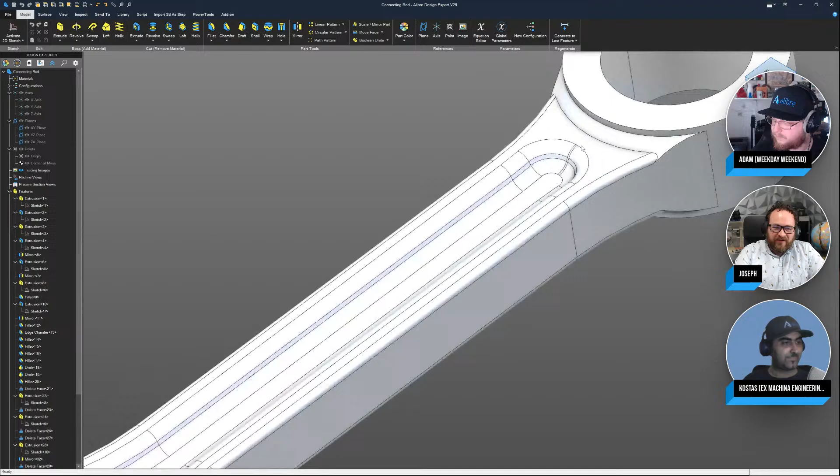But yes, Kostas, you're right. One of the things I think we want to ask is, are these fillets doing a job right now? And they're pretty close to a loading zone, so I'm inclined to keep these. But I think one of the things is FEA is iterative. You can test it with fillets, test it without fillets, and see if there's a difference, and then you can change fillet size or change meshing quantities until things stop giving different results, and you can kind of come to a convergence that way.

So step one, always make sure that we simplify and remove anything cosmetic and ditch things that might cause little tiny slivers that can throw the analysis off.

I'm going to open up Mecway here, and Mecway is just one of many things that you can use with Alibre. When I import, I can take this connecting rod that I have, and it imports the native geometry with interoperability - really nice not to have to convert to a step and reparameterize and do all of that.

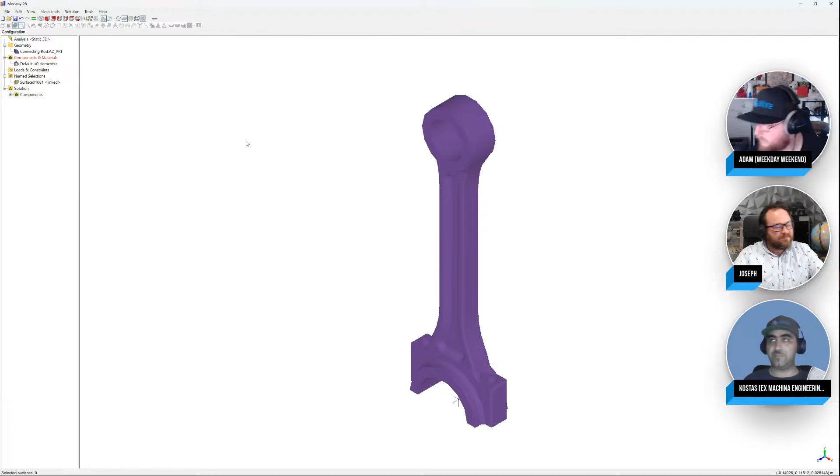Okay, so the next step is, once we import our geometry, basically what we're doing, if you've never done FEA, is we're going to choose some faces, apply a load on those faces, and see what the part becomes, where the stress is, and if we can prove the design.

And so in order to do so, we need to build something called a mesh. There isn't really a straightforward formula that tells us what the stress is when we apply the load to the part. And so a mesh is something that takes a big impossible problem and makes it into thousands of tiny solvable problems, so we're able to compute the part and see the stresses. It's the translation layer between geometry and how we get the math solved.

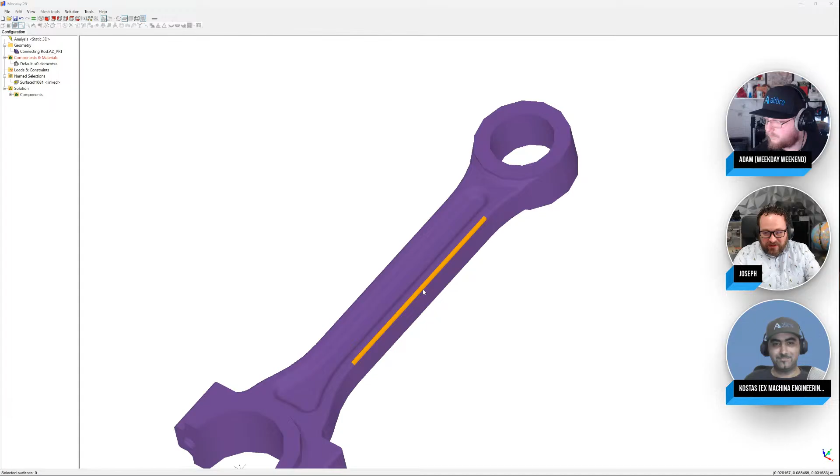So mesh builds like a network of nodes. But let's talk about what FEA is not. It's not truth. Every step of the way can introduce errors and inaccuracies, and we need to be careful to follow good practices and be skeptical of every step we take. The final authority of FEA really should be backed up by some hand calculations to verify that we're in the ballpark. So this isn't magic, something we just tell the computer to compute and it automatically gives us good results. We've got to be conscious of everything we do.

Does that land with you, Kostas? Oh, for sure. It's a bit of an acquired skill, interpreting the results you get from FEA. Your natural instinct is to just plot the legend and look at the maximum stress value, and if it's more than the yield strength of the material, you need to redesign it — which is not true, right?

By the way, we just had a message from Alexis in Greece. That's the guy — that's the guy that got me here, by the way. So shout out to George from Alexis in Greece.

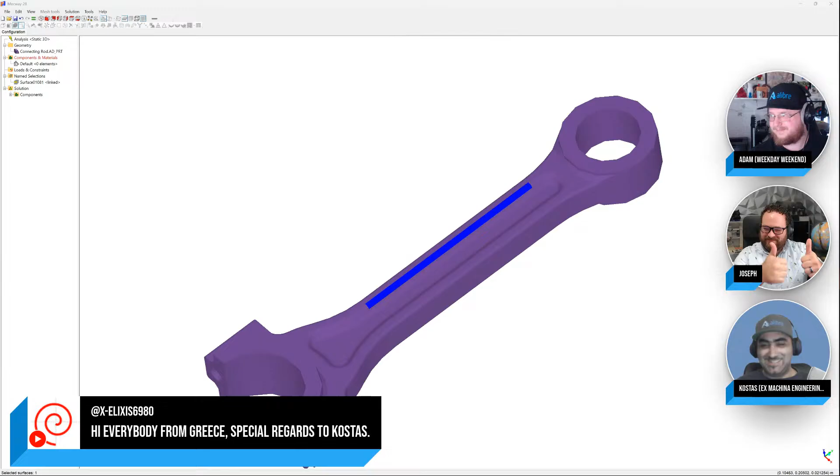So yeah, it's an acquired skill, right? In my video on how to do FEA with FreeCAD on a model designed in Alibre, at the end of the video I show the distribution of stress values. FreeCAD gives you a graph of the distribution of stresses across the nodes. You can see that on straight edges you might get a stress that's 5, 6, 8 times higher, but out of a sum of like 200,000 nodes, it only appears in 30 nodes, for example. Well, that's not natural. That's a fake reading right there.

So yeah, FEA is a massive tool, amazingly helpful, but you need to know what you're looking at. It's the age-old problem of trust but verify, right? Absolutely. Very, very much so.

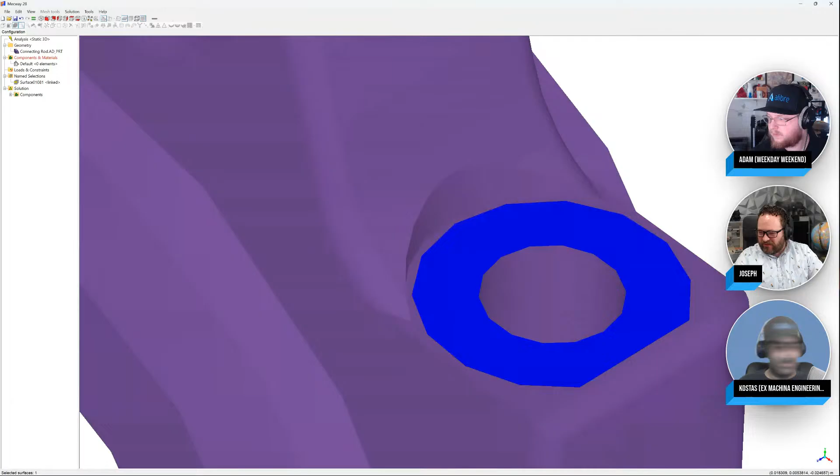So as we look at geometry, we can see that I have certain faces split in half — there's half of a cylinder, the other half of a cylinder. When we have bolts, there's a face that reflects the footprint of a bolt head coming down on it. And that's not by accident. I actually did some things in Alibre to split the face so that we can import it with certain faces that reflect the loads that are going to go on the part.

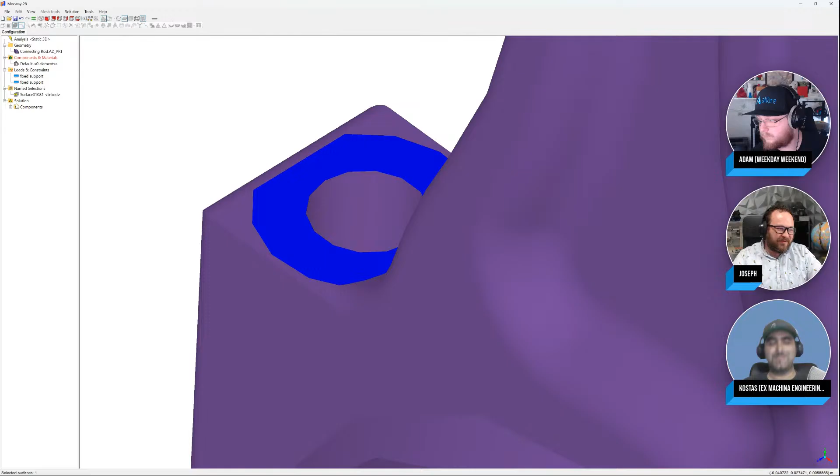We call these boundary conditions, the things we apply to the part to run the stress and constraints. So here I'll say loads and constraints, and I'm going to add a fixed support. Now, fixed support is very general. When we add these, we want to be a little skeptical and ask: would a frictionless support be better? Would a pinned or elastic support be better? There's all different kinds of things we need to ask — does this reflect real life? We're going to get into some examples of that as well.

Now I'm applying these loads to the geometry before I've meshed. One advantage of that is if I apply it to the mesh instead, and then change my mesh, I lose all my boundary conditions and forces. So something to keep in mind — that's my personal preference, to save some work for myself.

In the positive y direction, let's apply a load of about 750 newtons. We currently can't see the loads we've applied because we haven't made our mesh yet, but those are some of the things we really want to keep in mind.

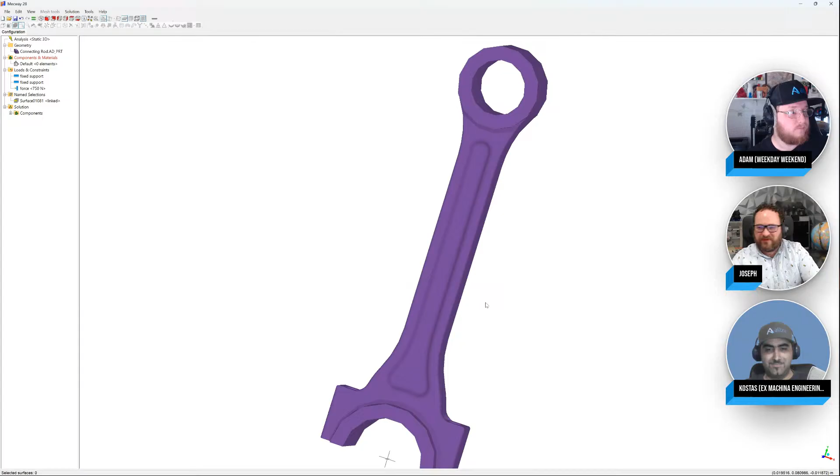So, is the load distribution realistic? I've made the top face in half to say I don't want this entire cylinder face pulling with 750 newtons — it's only realistic to say the top half. Now, is that going to pay off? Is that going to be realistic? We're going to see, and I think there's more to this story. Oh yeah.

Now, if it's time to build our mesh, we have some interesting options. I'll right click on my geometry and go to meshing parameters. It gives us all kinds of things.

Personally, I start pretty coarse and then refine. I have this predetermined setup that shows some good and some bad things about meshing. I'm not making a perfect mesh here, but one I can talk about more. So the maximum element size will be 10 millimeters, and the minimum element size is 1. Again, this makes a network of nodes that we solve thousands of small problems that converge into the actual solution we're looking for.

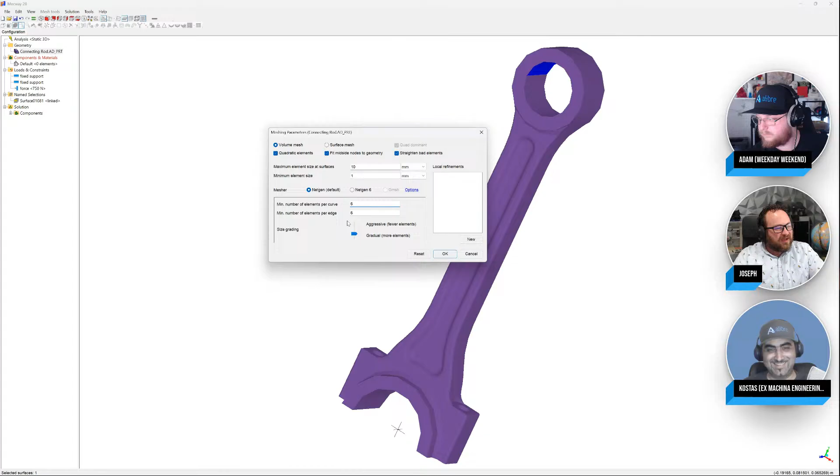And then I'm going to say 6 and 6. So the minimum number of mesh elements on a curve will be 6, and on any given edge, we'll have at least 6 elements along that edge. Again, you can play with it as you do and come up with the best mesh.

There are a lot of things.

I understand we're on a live stream, but just that window menu, right? Just a menu window, we could be discussing for 45 minutes, right? Yes, it gets deep.

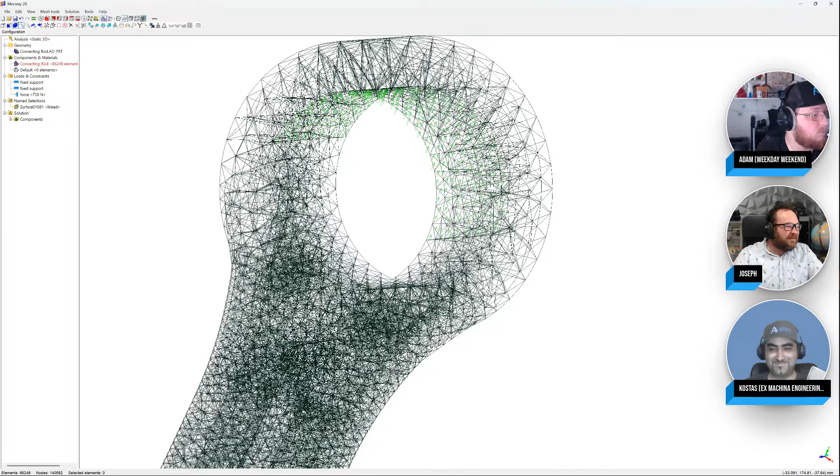So now that I've generated a mesh, we're going to be loading it into our view here. There we go, we have this network of approximations. We've turned the part into a whole bunch of triangles. If this sounds like an STL file, it's not all that different. And this is kind of a mess to look at, so we can change our view to see the outer surfaces here.

There's a few things that maybe we would like to review. A big thing is, look at this triangle right here. This is a beautiful triangle because it's just about an equilateral triangle. We might call this a good aspect ratio. If we come down here, look at these triangles that are not equilateral - we care about that.

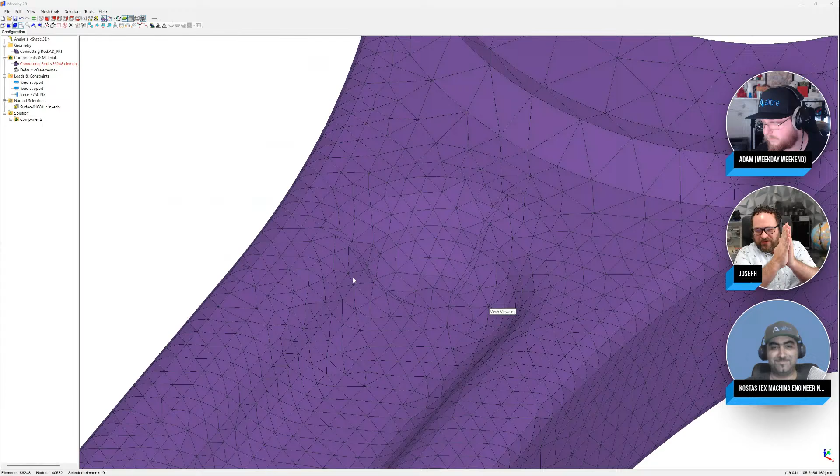We would probably call that an element Jacobian issue, or how much aspect ratio or how distorted is this mesh. It's probably not possible to have every triangle be perfect, but that's what we're going for. So when we see things that are really distorted, we ask, are they in a place that's really critical? Are they going to cause any errors? Do they converge into like a little needle? But I'd say we have this big load path here, and then we have tiny triangles here. As far as Jacobian goes, these are probably more of a small footnote than something we're going to have a showstopper over.

But what do you think, Kostas? So you chose the maximum element size at 10 millimeters, and you chose the minimum at 1, right? Yep, in that menu we were talking about earlier.

What is that fillet size? Like 3-4 millimeters? Somewhere in there, yeah. So if you drop your minimum size to 1/10 of your smallest fillet, you would get further away from that situation. Maybe not eradicated completely, but then what you're doing is creating a huge mesh and a huge mess, and you're taxing your computer

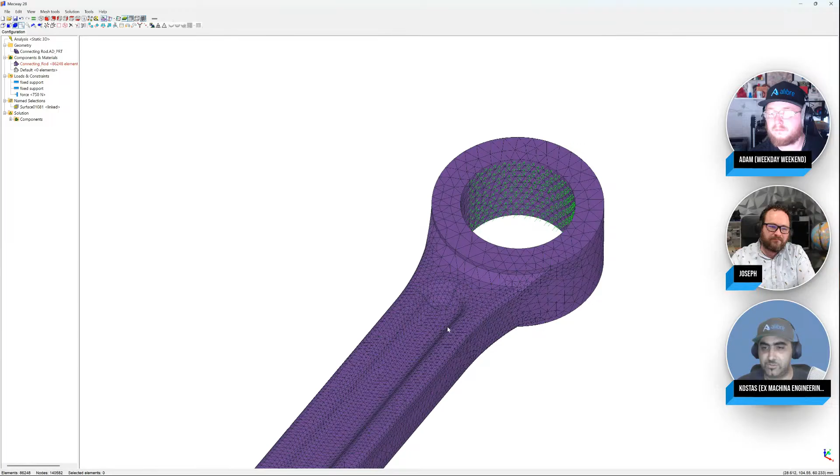and the piece of software that does this meshing - they're very, very memory hungry in terms of RAM, right? So I've had, especially in older PCs, solvers fail because they ran out of RAM. So that's another thing to consider, right? There is a physical limit to what you can get done with your current system.

But yeah, generally speaking, that's not ideal, but it shouldn't fail while solving. And a big question is, what are you solving for? Right now, I'm solving for quick results so I don't keep everybody on the live stream waiting.

There you go, absolutely. There are times in thin areas where if you have bending, you're going to want to have a lot of layers across that little thin area so that you can have the resolution to see where's the zero axis, how's the stress being distributed. So setting up your mesh is so critical in so many ways.

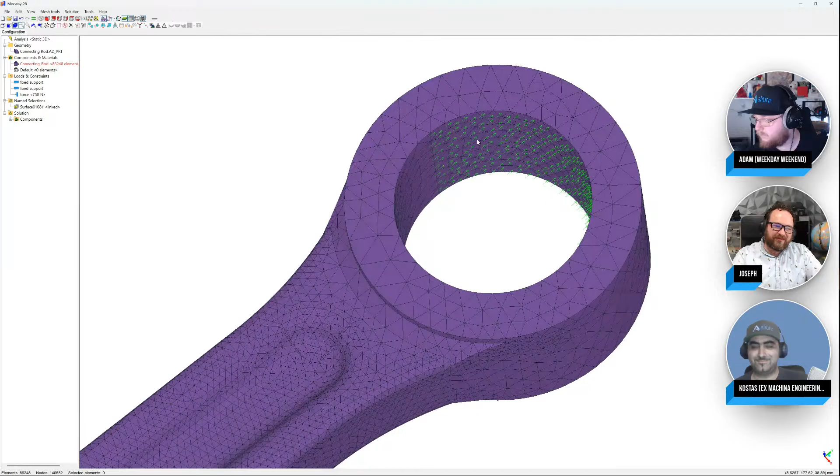And I might point out the important parts are things like holes to have a fine mesh on, and fillets, and also where the stresses are. And I wanted to point out that our mesh is looking pretty large here.

And Mecway offers a really cool option where I can select the face of a mesh and just click on Refine, and it makes the mesh twice as fine. I can do that again and again. So we can have a coarse mesh throughout the model that is light and easy to compute, but in really important places, we can refine it to get something that is more substantial and high resolution. And this is not the best mesh in the world.

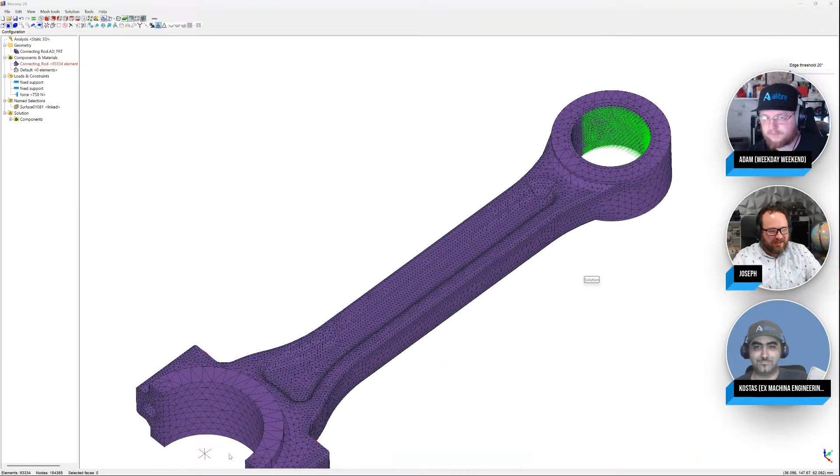And I kind of have done some of that on purpose so that we can view the results and see potential problems and know what to look for. All right, so we've got a mesh. We have our forces. We have said that where the bolt head is, that is staying put. We're not moving these fixed places on the bolt heads. We're applying a force up here, and the mesh is what calculates or helps us do the math to solve

this problem. I'm going to go ahead and solve for this, except I just remembered we're going to fail because I need to add a material. Yeah, that'll do it. You get in a hurry when you get live, what can I say? So we'll assign a new material. Mechanical, isotropic, let's say 200 GPa, ratio of about 0.29-ish. That's steel-ish. Steel, yeah. Low carbon steel, that is.

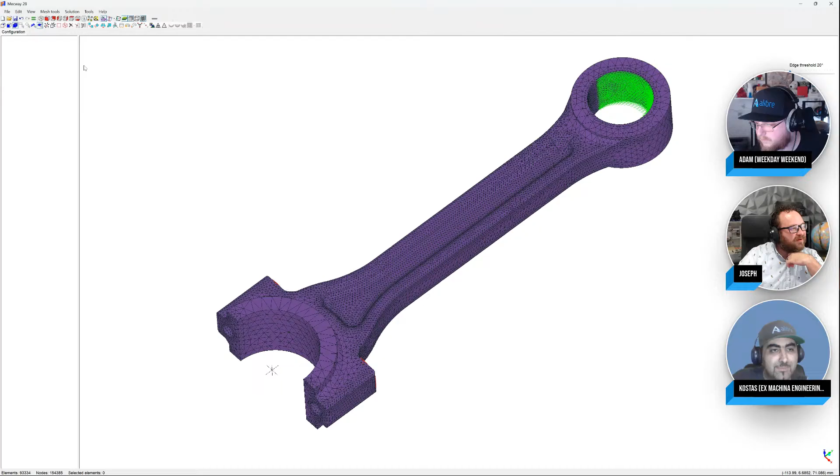And it looks like it didn't take that material, so we'll go ahead and there we go, isotropic, 200 GPa, and then 0.29, yep. Yes, thank you. And I'm still getting material error, so we'll just make sure. Assign new material. I think I was just doing that on the wrong part there. There we go. And we are solving. This is not the best mesh in the world, so we're going to see what kind of results that we have.

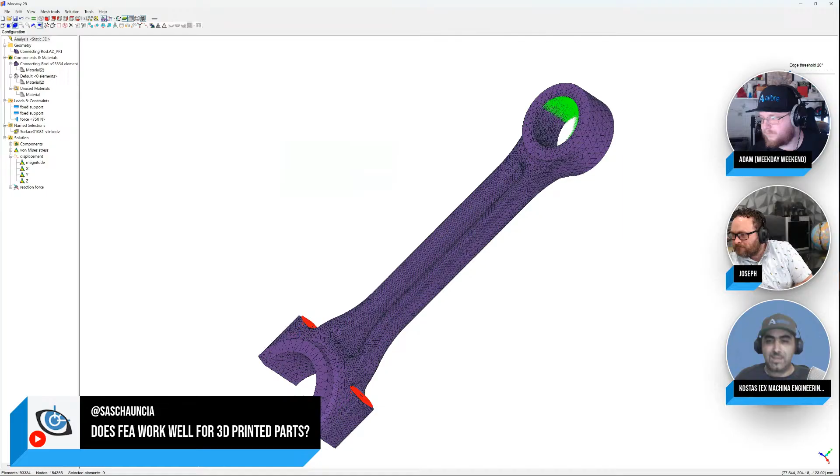In that sense, 3D printed parts behave a lot like wood. I was going to say the same thing, with the grain or against the grain. Yeah, against the grain or across the grain, exactly. Anyway, so you need to take that into account. Now, that is not an isotropic material, but there are finite element analysis software that will allow you to input that discrepancy, right? To define the difference. And I found that if you take into account that layer adhesion is like 15 to 20% of the strength of the material, you can get some decent results.

But I would love to see an FEA dev basically take some features of a modern slicer and combine it with FEA tools to be able to slice your model and then create a mesh and then do some FEA calculations. That way you get accurate infill. Imagine this. Couple what you just said with a robotic arm doing the printing, where you can change the layer direction while you're printing the part, and you just created something really interesting.

And there is research in that area, but at the moment it's just in universities, and there are random papers being put out, but nothing that everyday people can use, right? If anybody here is amazing at C++ or Python, go and work on the FEA analysis part of FreeCAD and add that in, will you? There you go.

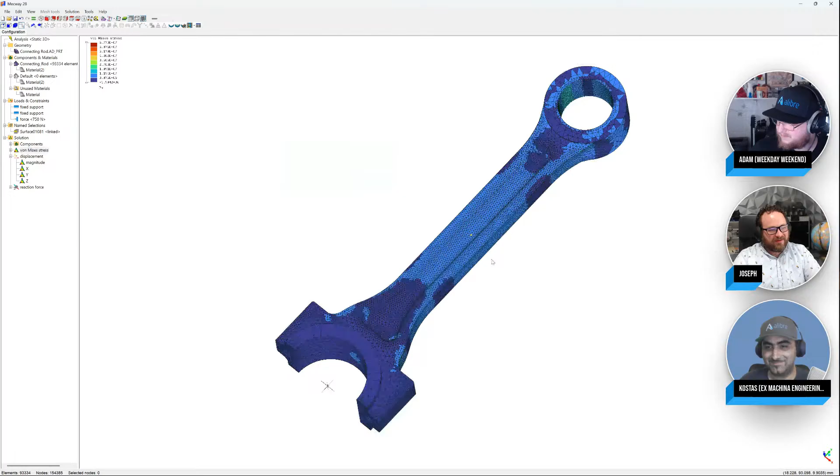So we were able to calculate and we were able to get our results here. Nice. Yes, we might call this our von Mises stress.

I'm not very good at pronouncing French things though. Von Mises. Isn't it German? Is it, or is it French? Yeah, Poisson is French. I know that. Poisson ratio. That's a French guy. Von Mises sounds like a German name. Pretty sure it's German. Could be wrong.

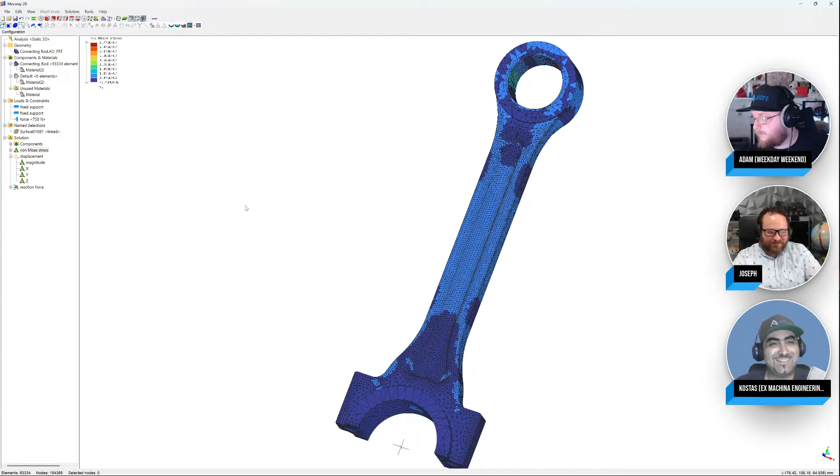Anyway, so we've got this beautiful thing. Now, I think some people might be looking at this and saying, look, we have almost no stress going throughout our part. This is a great win. But we're looking at scaled numbers, right? What if that blue is 90% of the part's capacity to hold stress? Exactly. So we can't pat ourselves on the backs just because the colors are looking low. Not just yet. And that might actually indicate a problem because it looks like we're getting the highest stress in a very concentrated area. And this indicates a few problems.

So the colors are pretty, but we got to do some validation to see how legitimate they actually are. And I think one of the things that we should start off with is this animation of the part being pulled. Of course, this isn't the real displacement of the part, but we look at this and ask ourselves, is this a realistic version of how this part is going to interact under force? And if something is going terribly wrong, then we know there is a mistake with how we set up the analysis, and it's a good high-level indicator.

We also might want to do a few other checks. So we might want to balance our forces. And so here we've applied a 750 Newton force upwards, as you can see there. Which is very small, by the way, for a conrod, right? It is pretty small. During the combustion stage, they take close to a ton of weight in load, like 1,000 kilograms of force. So 750 Newton is like just tickling it. This is an idling analysis. Okay. It's like you're going downhill, no throttle.

Right. So I can look at reaction forces, and I can say take all the reaction forces and evaluate what they are. And we get negative 749.99999, right? So we lose a little bit of forces in the X and Y direction. But this is a good litmus test because then if I say all my forces in the X, that's almost zero, e to the negative 11. Evaluate again, negative 11. So that's another thing, we were able to balance our forces. I don't know if anybody would take an FEA seriously if there's not a verification that the forces have been balanced.

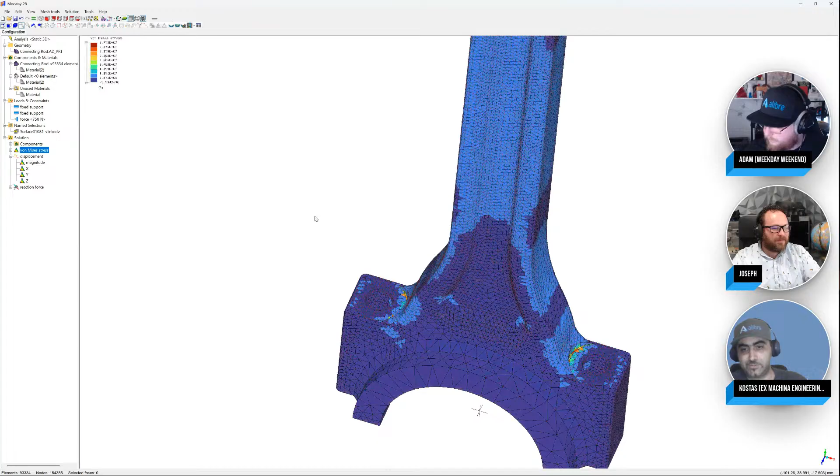Yep, exactly. And many times that reaction force is the result you're looking for, because you might be running this entire analysis just to select a bearing, like a plain bearing, right? Yep. So then the reaction force is the result you're looking for. You don't really care about the stresses developing. That's a great point.

So when we come into here, this area is really problematic, and I think it teaches us a few lessons. One, I have something that is almost as red as it can be on the scale, and it's butting up against something that is almost as blue as it can be. So this is a call for a few things. The first one, there is a stress gradient, right? There's a stress that is high in some places and it goes lower, but we can't really see that well because we haven't refined our mesh. We need more nodes in this area to get good resolution.

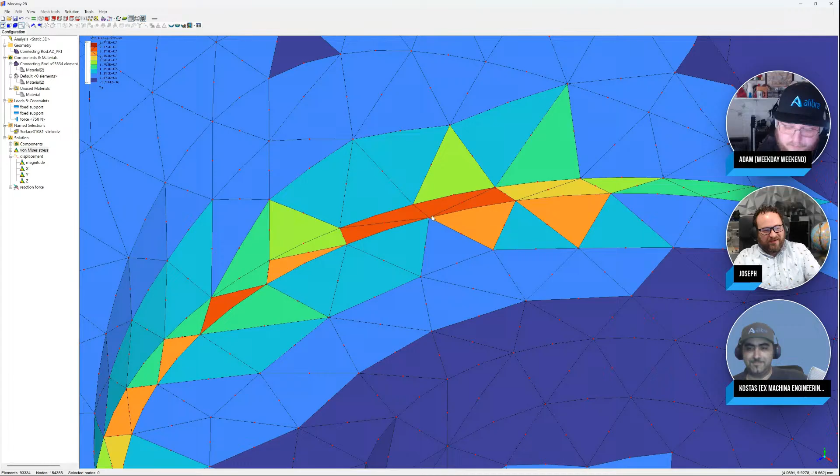That's something that we want to look for because we see the colors, but it's not giving us very valuable information. And another thing is we have a sharp edge right here, and we can tell the stress is building up right there. This is a lesson that we need to check this geometry to make sure that it's going to work. Yep. When we scale this, say in megapascals, we're at 67 megapascals, and the yield is probably a minimum of 200, depending on the kind of steel, I think. But at least we're not breaking.

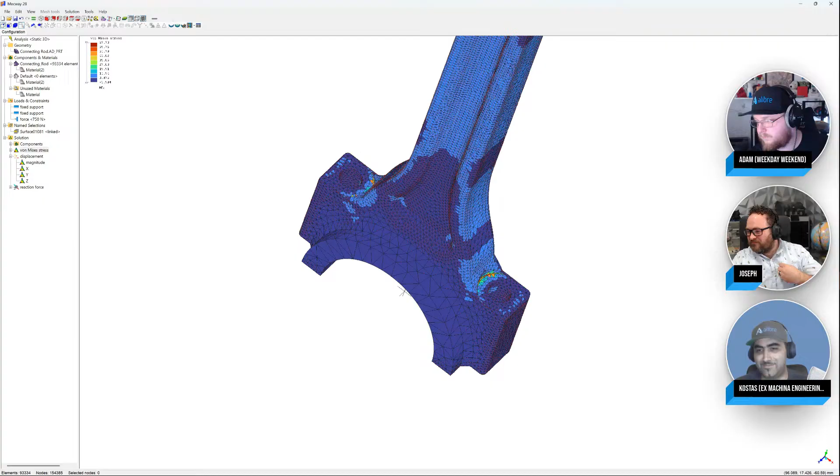200. I don't think there is a conrod in production that has a yield strength of 200. Yeah, I don't think so. Like, minimum would be, what is the next one up in the DIN designations? I think it's 275. Yeah, should be, which is like a 1040 steel, if I'm not mistaken. I haven't used these conversions for a while. And it could probably go way higher too, depending on how they treat it. You can even have motorsport connecting rods with stellite, titanium alloys, all that stuff. Then you go really high numbers. Absolutely.

So these are a lot of cases that we want to look at. Now we can scale the colors, and we can ask: is this realistic? Also, would we be getting a lot of stress in the regular function? Now, if you recall, I split this face into two cylinder halves, and maybe I want to pat myself on the back and say, "Oh, look, I applied the force on the half that sees the force." But I might want to question: is this actually realistic? And I think one of the lessons is if we set up the study a certain way, we get results in that certain way, but it may not reflect reality. So we could probably do a better study.

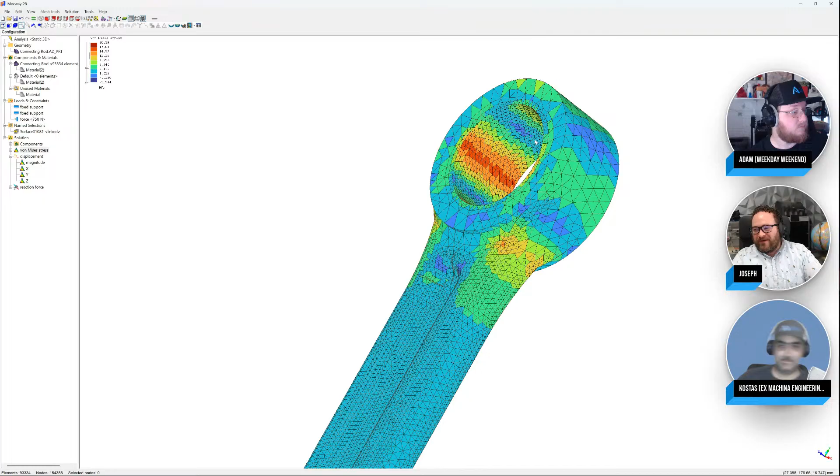Let me load some results here. You can always do a better study. Oh, yeah. That's the problem with finite element analysis, right? It does depend on the computer you have.

While he's loading that up, there's a really good question. Do you have some proposals for CFD working well with Alibre? That's a great question. I'm kind of wondering. Oh, it looks like my import completely failed. Oh, maybe not. So for CFD, I don't know if that's on the radar yet, but I would sure like to see CFD. So we are going to have some other FEA people with us, and maybe that could be a direction that we could look into. I love that suggestion.

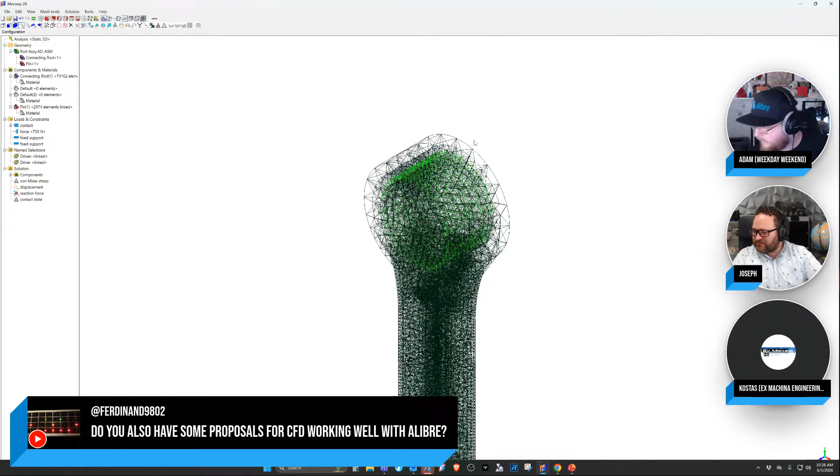I read that as Golden Knights for a second, and I thought, "Ooh, a hockey fan," but they're in the final bracket.

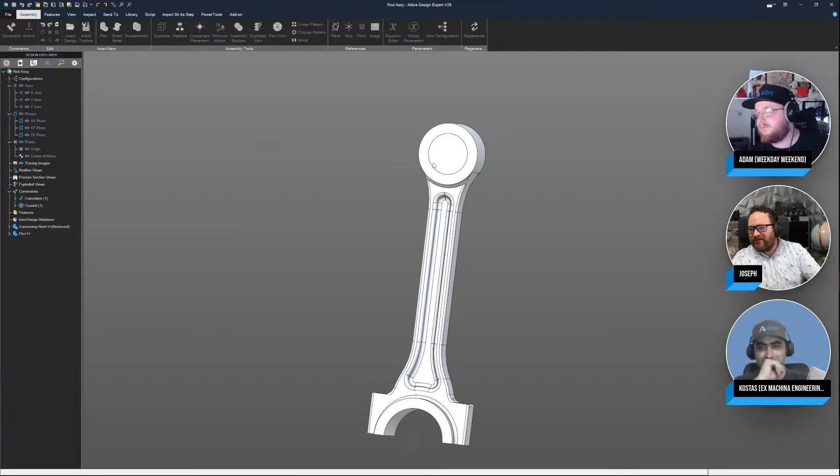Excuse me, show my stress again. I don't know if this is going to work. I got kind of a funky import on it. But I did something different here. I made an assembly. In fact, while that's solving, I can pull it up. Where I put a pin right in the middle of our rod that would represent the wrist pin. Exactly. And then I put a contact constraint between both of the bodies to say these are in contact. And I think we might get a much different result just by adding another step to make it more realistic. Yep. Do the colors look pretty?

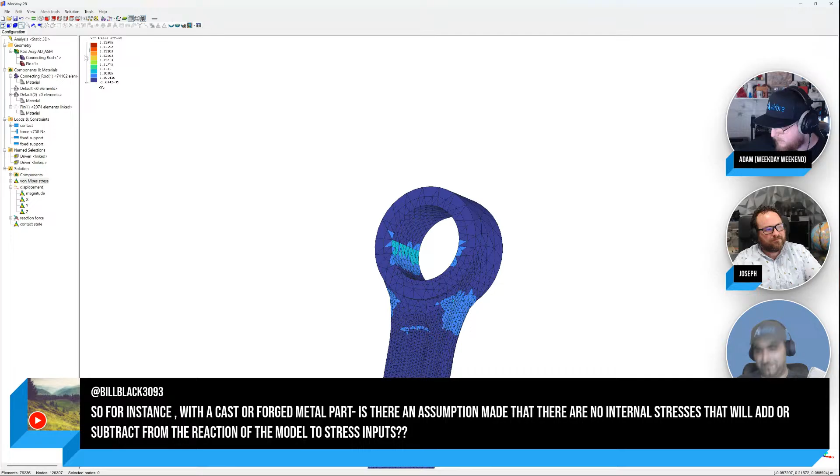So this guy is Bill Black. I believe he's Taco Guy, right? Yeah. For instance, with a cast or forged metal part, is there an assumption made that there are no internal stresses that will add or subtract from the reaction of the model to inputs? Excellent question. Yeah. So Bill Black has touched on a huge subject there, right?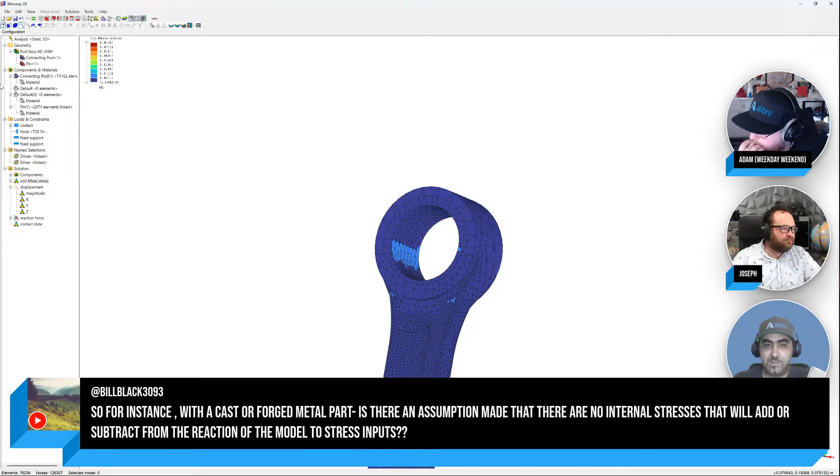The problem with that particular question is that you do not know what the internal stresses are unless you do some test runs, right? Some destructive testing. But when you do have that information, you just sum the stresses that you get from the finite element analysis with the internal stresses as they appear, and that's about all you can do. I do not know of a way. Well, I guess you could model them as pressure loads in your finite element analysis, but you're making way too many assumptions.

Just like with 3D modeling, we say that you need many features that have simple sketches. Finite element analysis, you could say that you have a similar rule where you have potentially many simple pieces of information rather than trying to build a very complicated one and throwing it at the PC. If that makes any sense to anybody. Yeah. That's a great question.

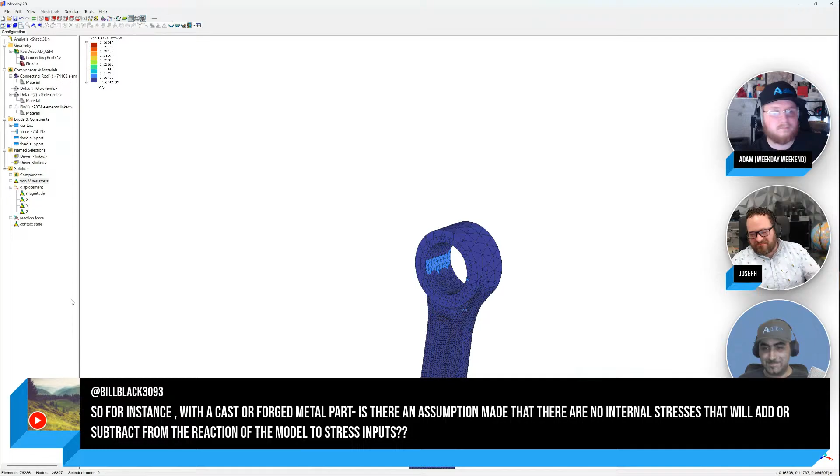So yeah, when you go to show that you can add a pin in the middle and make it even more realistic, right? There's always a better analysis, and it's really kind of an iterative process. Try it with this mesh. Do you get different results if the mesh gets finer? Eventually, you start converging on the same results with different settings, and that's when you know things are at least consistent. And if you're running it on a really good basis, that's pretty encouraging.

So the thesis, I think, is have it connected to the real world. Do some hand crank calculations to make sure you're in the right ballpark. Oh, for sure. Make sure you question every step of the way and understand what meshing implications are. So, just a quick overview on what that's going to look like. We're going to revisit this topic in even more detail, and we're actually going to have someone from SimWise come and show what the Alibre add-in for FEA looks like, which will be pretty exciting.

There are softwares that specifically simulate casting or forging and can show what the internal stresses are going to be with the right modeling and simulation. Very nice. Very good to know. That's very interesting. I'll admit right off the bat that my weakest area of expertise is casting, forging, that sort of stuff. So I've never used that type of software, but I can imagine, because internal stresses come from differential cooling, right? When the part cools at different rates, that's how you get your internal stresses.

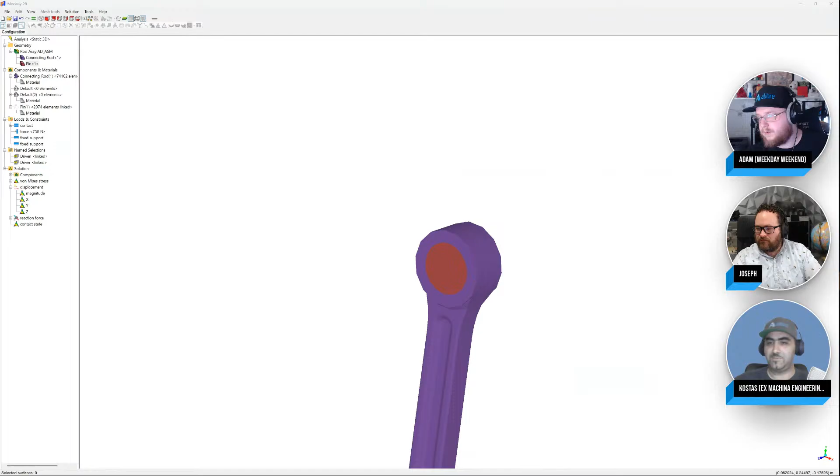And if they can simulate the cooling, I bet you they can get a pretty good idea of what those stresses are. So yeah, for sure, that's very interesting. It's a nice insight into that side of engineering by Araf. Basically, trust but verify. This is already an old video on my channel here, but this was a SolidWorks injection mold analysis that was kind of cool.

Yep. I think it's kind of along the same lines, but you can see it fill, you can see how the plastic's acting and all of that. Yeah. I also did that. I also have one in my channel. I don't know if it's public still. But Inventor has a nice simulation module for injection molding. Yeah, so pretty cool stuff.

Let's see, that's a pretty cool wallpaper right there. Yeah, I love that. Hot rod going into the Supra, huh? Is that a Mustang way in the front? Skinny. I think so. Yeah, because you need to give the Mustang a head start, or otherwise it's not really fair, is it?

Well, I'm a bit of a Supra fan, so I probably shouldn't weigh in on this one. Well, yeah. I might drive a French car, but I'm JDM deep down. Gotta love it, man. The 2JZ was such a crazy engine. Yeah. 2JZ, RB26. There's another straight six from Australia, the six-cylinder Barra motor. That's a good one too.

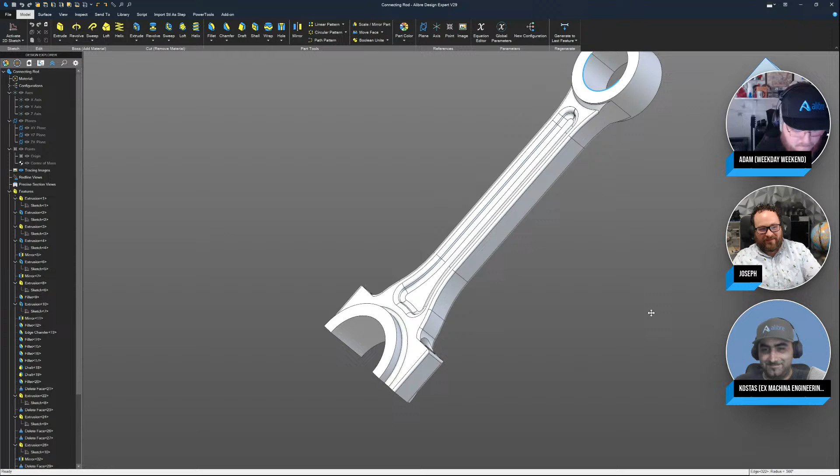Now, I think when you do FEA, it's really important to be able to split your faces, because I need something that shows the footprint of the bolt, or I can't really select it to add a force, at least not conveniently. Extremely important. So I'll just run through that real quick. I think it really is.

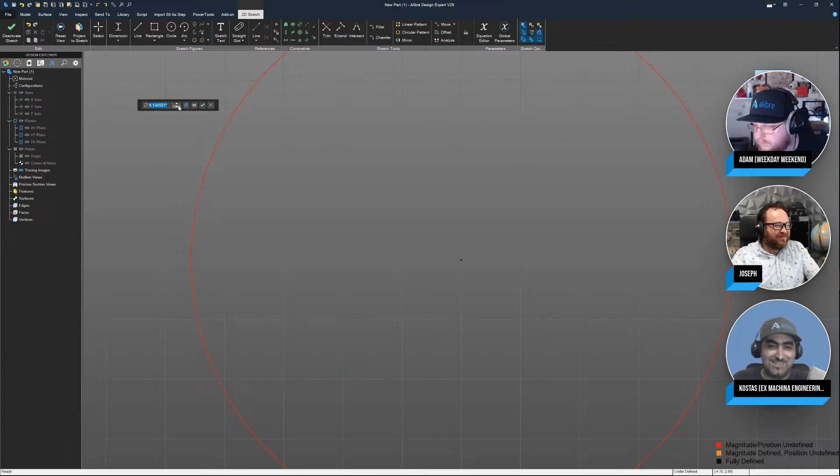Man, if I had known about that method that you developed to split surfaces in Alibre earlier, it would have saved me weeks along a few projects. That's such a clever thing. That was an awesome video, man. I love that one. I appreciate it, man. It's so useful.

So the basic way to do it is I have a model. I want to split this face to simulate maybe the footprint of a rod pushing into it. So I will activate a sketch, make a sketch around the area that I want to split.

Corvette versus Supra. It's been done before. Let's not get into that. As long as it's one of the old Stingrays and not one of the modern ones of the past few years. Well, the modern ones are closer to the Supra. That's the issue there, right? I love Corvettes, by the way. I absolutely love Corvettes. Let me just say that. So dino dragging a Supra, that 2JZ was a beast. It was something, man. You just can't beat the LS.

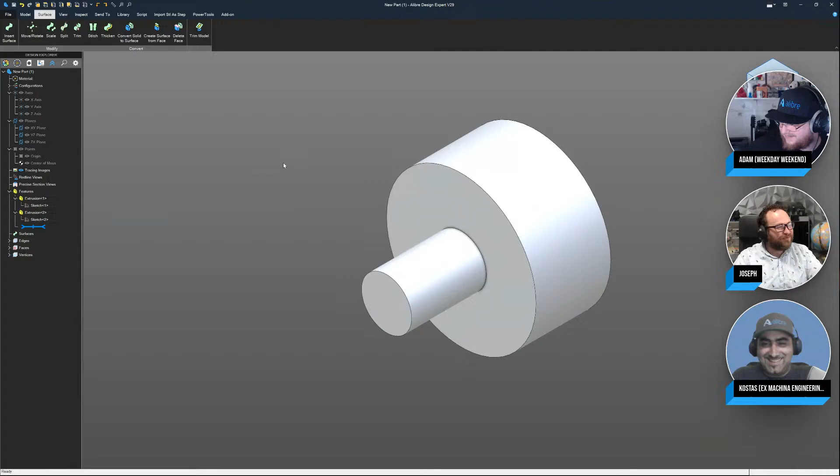So I make an extrude on the face that I wish to split, and then I can get back to CAD. Delete face. Now we have just a hollow surface with the thing that we want to split that's missing, right? So we start a sketch on here. I can convert this as a figure. I can extrude, and then once again, go back to surface.

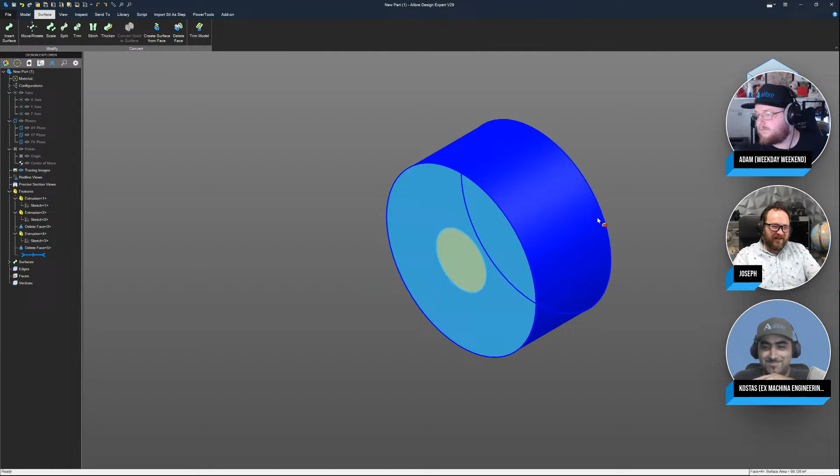And I only care about the bottom surface of this cylinder. So I'll select delete face, get rid of these faces. And I've created a surface here that fills up that missing spot. And then I have my regular surface that I converted. I'll just stitch that to a solid, right? Stitch to solid, select these two, and I've got a split face.

Now this is useful for creating a face for a contact patch, but it's also useful if you want to add text or a label, like a warning label or a logo, if you want to render something that has a different spot without adding these micro extrudes that might throw off mesh. So it's very useful when you want to split faces and create these kinds of geometry, and there's more than one way you could use that. Very nice. Little quick mini tutorial for everybody there.

By the way, those micro extrudes is the way I used to get things done when I needed to. And oh man, you just go down a rabbit hole, and they're so restrictive with what you can actually get out of the analysis. And this method that you showed everyone is so much better. Yeah. Micro extrudes really hurt because you're like, I have to put tiny mesh along that little wall.

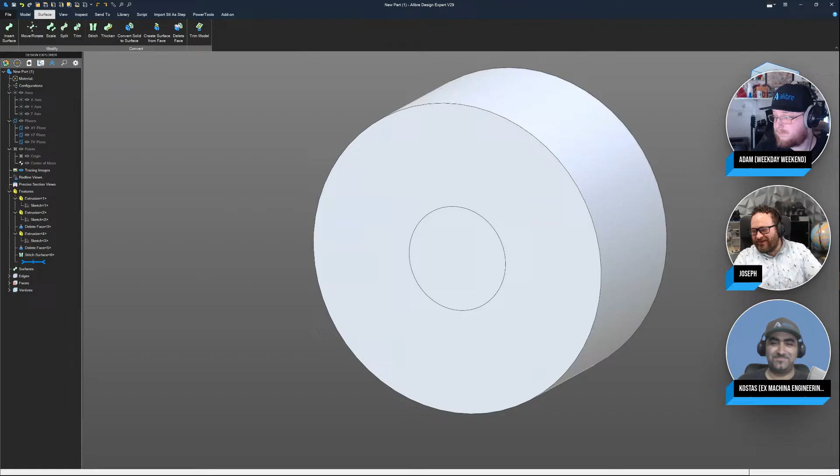Exactly. Which makes everything worse, basically. Yeah. Oh, okay, that is my wife. When we're together, she usually has to drive because if she's shotgun, she'll get motion sick. So yeah. Well. Okay. I'm glad she's a good driver, though. So no problem. That's good. Yeah, but the solution to that is you just get like a stupidly fast car, and then they don't have time to complain. Oh, yeah. Anyway.

That's interesting. Yeah, similarly, if we're modeling a 3D printed part in FEA, the part would have to go through the slicer process first. You'd have to have a GPU farm under the desk to crunch all those numbers. That's very true. Finite element analysis can get very resource hungry very, very quickly.

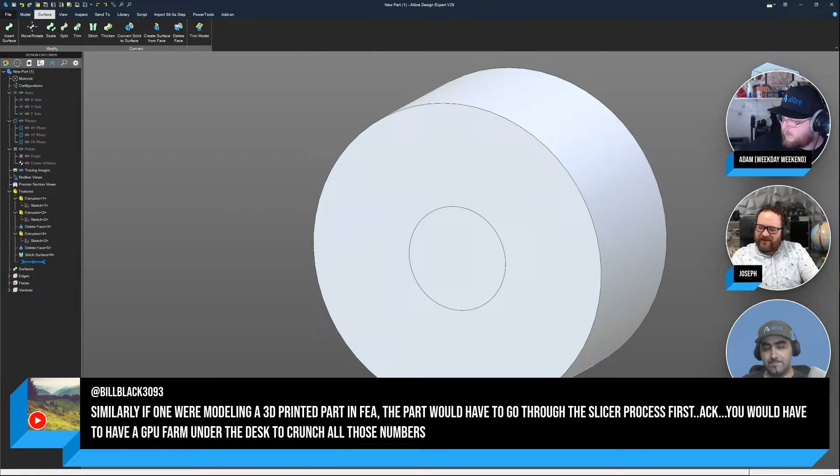I think one of the things that really helps with that is using a quadratic mesh, which we didn't cover. But let's see if I can. Anyway, on your triangle, you can put a node at the midpoint of the line, and the node can have some curvature to match curvature better. It's known as an integration point, and it's also another spot where you can solve. So it increases the number of nodes and resolution without drastically increasing everything. Yep.

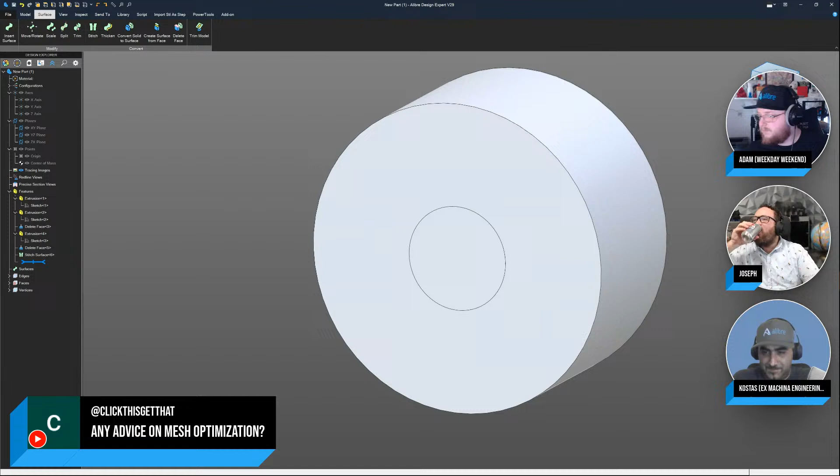Oh, that might be a good one. Mesh optimization. Oh man. There are methods you can use, but just like it's better to prevent a disease than to give a medicine for it, it's better to simplify your model before going through the entire FEA process. But if you have to have some features for whatever reason, you decide that this feature needs to stay in. Mesh optimization is basically two different things for me.

One is minimum and maximum size of elements, right? And the other is most meshers will allow you to select a specific area, just like Joseph showed earlier, right? Select a specific area and increase the mesh size or decrease it or manipulate it or whatever. Some meshers also allow you to select an area and give it different maximum and minimum element sizes. So the idea there is

small elements give you better precision, but you run a higher risk of having a singularity in your calculations where you get infinite stress when in reality there's not going to be infinite stress, right? And it actually runs slower, whereas larger elements means you have a more robust analysis, less chance of it to fail.

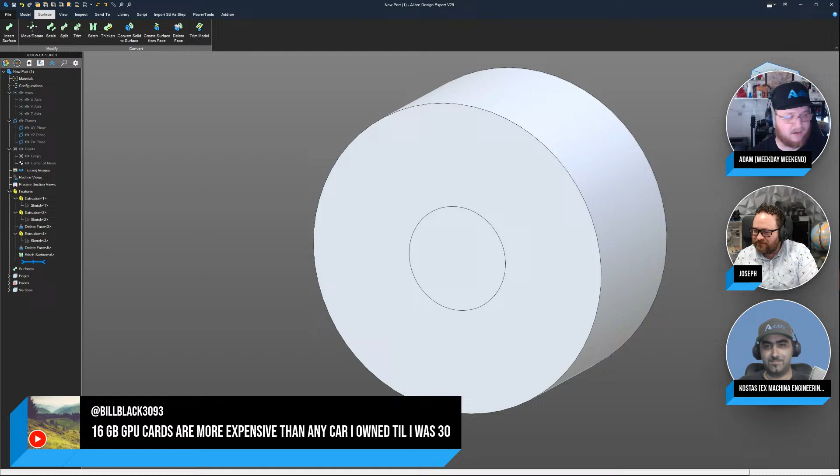Bill Black. Yeah. I don't know if you've checked the price of RAM recently, but I'd rather buy a video card than any kind of RAM right now. Yeah, yeah. I'll buy like a 5060 or a 9070 non XT before I'd buy 32 gigs of DDR5 right now any day. Yeah. But that's a good point.

Yep. This is a good one too. Have the mesh fine enough that one color zone is at least a few cells wide. I think that's a good one. That's great advice. Yeah, that's a good rule of thumb.

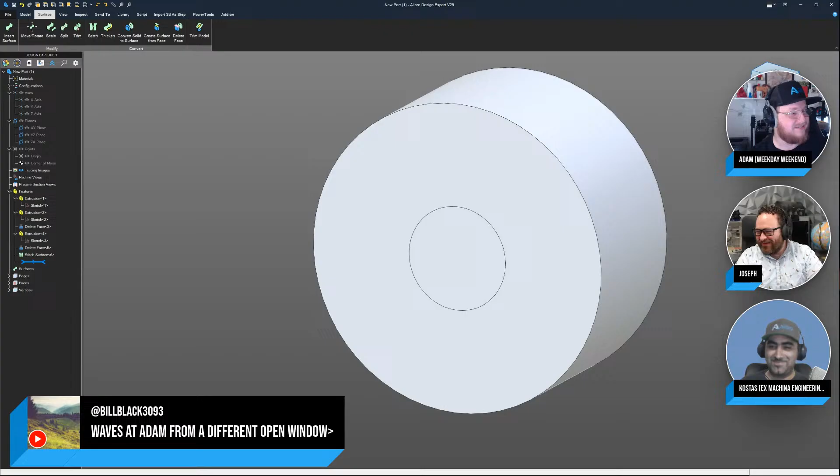Yep. And that's our winner from the last one. Won some maintenance, so good to have you back. Oh, Araf is a regular viewer, I think. Yep. He is. Waves at Adam from a different window. Yeah, he moved to my chat from the Alibre chat. He's got multiple tabs open. He's got us all. Hey, that's awesome. There you go. There was once someone, when I used to stream a lot more doing video games, who told me that he just keeps my stream open on a tab all the time. So whenever he just hears my voice talking, he knows that I'm online, just out of nowhere. Okay. There you go.

This is an interesting one. Took a numerical methods class that taught about doing 3 different grid resolutions, using all 3 to try and estimate the true value. Is this something that should be done in FEA?

Yeah, basically that's what Joseph is describing, right? When you change up your parameters, but your results are relatively stable, then you know that your results are not fake. They are results that you expect to see in real life when you load up the part. So it is very much a similar thing to do.

Yep. Sounds very scientific. I'm not an FEA guy, but basically, when you test something scientifically, you don't do just one test and say, 'Yep, that's the correct answer.' You do a couple tests, sometimes dozens or hundreds of tests.

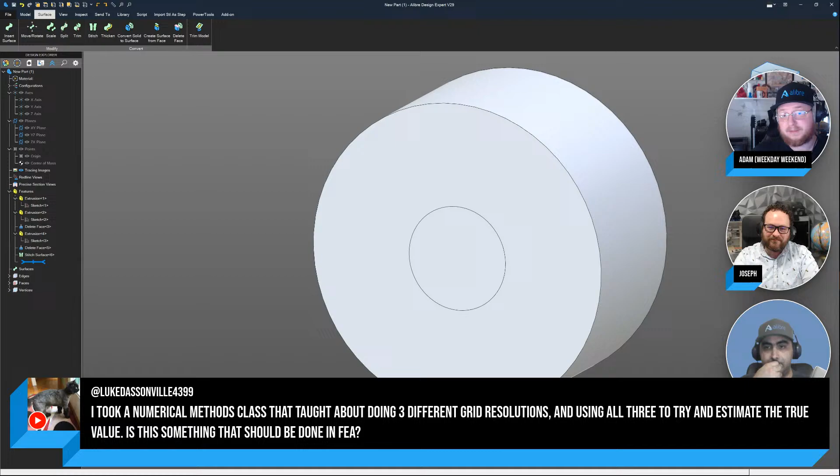If this is going to be a part that's going to go into hundreds of thousands of production units, you're going to want to spend quite a long time making tests. As soon as you get those results solidified, they're the same, and you can trust and repeat those results, then you know what you're after, and what the actual solution is.

Also, because you mentioned large production runs, right? If you're making a part in large numbers, you do the FEA, and what you do next is you go and break the part. Yep. You put it on a hydraulic press, load it until you have it in pieces, and then you check: was the failure point close to where the FEA showed me the red color?

Because then you know that the FEA did predict the stress pattern, so I know I can trust it. If you break it and it breaks at a different point, there's something wrong with your finite element analysis, and you cannot trust it, and you need to go back.

Since we're doing it, I'll tell you a little trick that one of my professors taught me in university. Maybe everybody knows it, but I kind of liked it when I first learned it. You make your stress analysis and load your part with 1 Newton. That's your load, 1 Newton, right? And then what you plot is your safety factor.

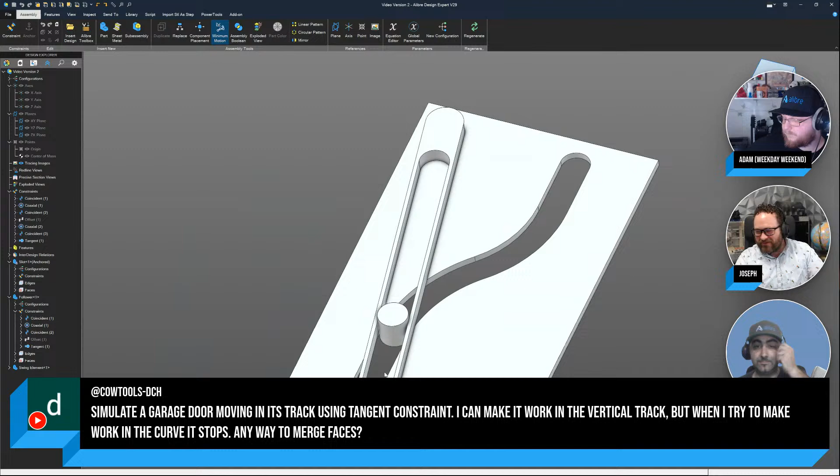Okay, I think I've got one for the Cow Tools question here. I want my pin to follow in this groove, and that's really hard to do because there isn't an assembly mate for tangent continuous across all these faces. So there's a few solutions, but I've got a part that as I move it, it moves linearly, but the second I let go of it, it snaps into the right spot. If you were to make an animation out of this, it could look really smooth, but it just doesn't look smooth in your user interface. The question is, how did we do this?

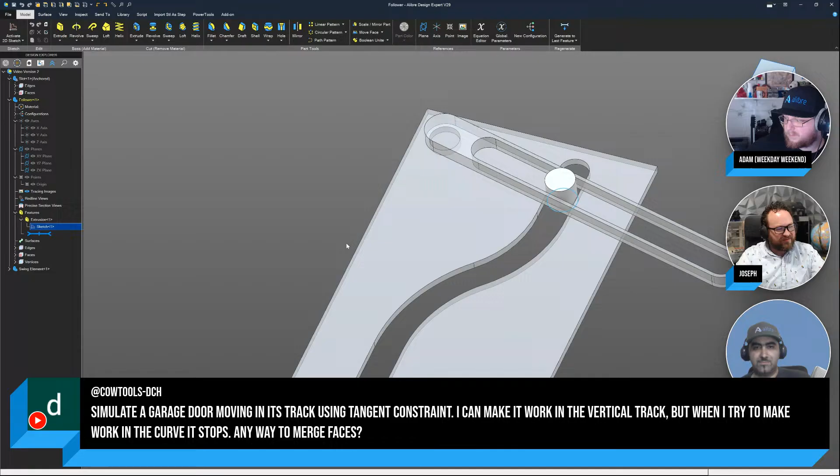So I'll jump into this part. We're going to edit right here in the context of the assembly. And when I create this sketch, you can see that I've imported this edge right here, and I have a spline that runs along this edge. And then I've said I want this part to be tangent to the spline, and that's how I define the position of the circle. So when I move the circle down here, Alibre rebuilds and puts it into the right position. So it's how we can get things to follow along tracks. I wish it was continuous in the UI, but hopefully that is a good solution.

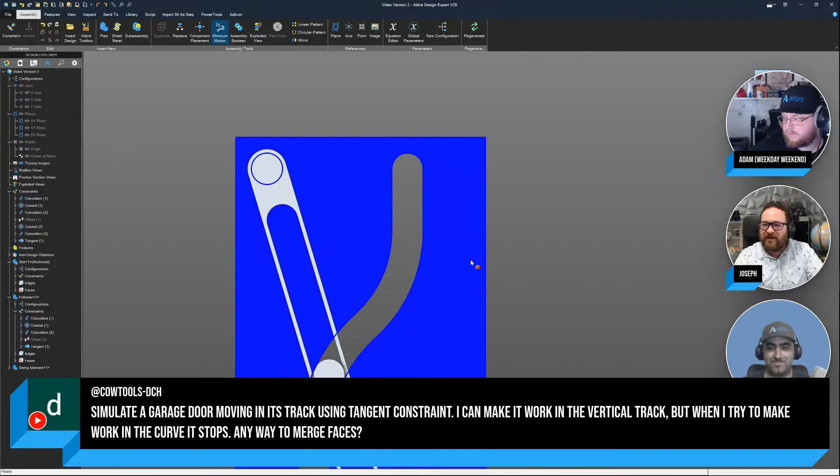Let me go find that video, and I'll put it in the comments, so you can see in step-by-step detail how it's done. In the meantime, if I can just highlight another comment here. Absolutely, we might get back to Cow Tools afterwards.

From Argentina, that's a very good tip right there. If you have symmetry in a model, do not simulate the entire model, because as many nodes as you save from your analysis, it just becomes easier and easier, and you can get it more precise for the same resources or time. So that's a very good tip, right? Just use whatever symmetry the model has, just go ahead and use it. For example, I know that for some parts of simulating a wheel for a car, they just simulate a piece of the pie, they don't simulate the entire thing. Stuff like that. If you have symmetry, use it, reduce the number of nodes as much as you can.

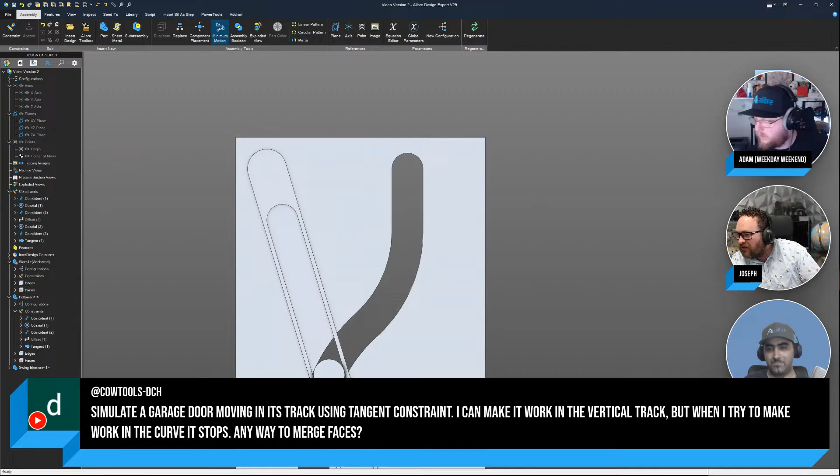This one looks interesting. Probably for getting a more accurate stress in that area, you should use a nonlinear material and define a steel with elastoplastic properties. We haven't talked about linear versus nonlinear yet, that's probably a good topic to get into. What Sergio is getting at is if your part's stress deforms a very small area, a very small zone of the part, that's where a micro crack will start, and allowing the simulation to take into account plastic deformation will give you better insight into that.

You do need some pretty decent systems, guys, to run these types of simulations. It's by no means a guarantee that if a PC can run Alibre, it can also do these types of things. I want to reiterate that finite element analysis is resource hungry, but that's a very good tip: if you need to cut it very fine for aerospace design or something, get yourself a good gaming PC.

I was actually told that in person by a CAD specialist a few years ago: get yourself a gaming PC, and you could get a nice desktop, or a laptop if that's your thing. Those GPUs are designed to render meshes and calculate physics and all that kind of stuff, so get yourself a gaming PC. And if you're a business owner, get your guys some nice PCs, because it will pay off in the time they save waiting for results.

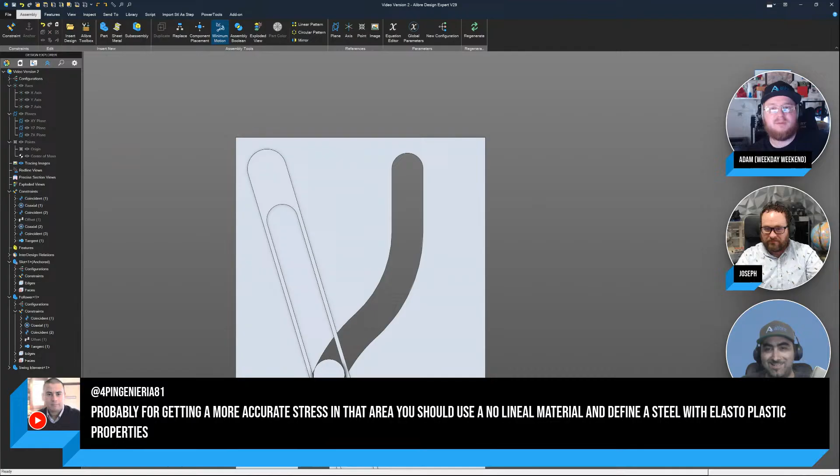Because they've got a deal with Nvidia. So what that comes down to is essentially a whitelist of GPUs, which creates a bigger problem, because if you're using a GPU that's on the cutting edge and it's not on that list yet, then you're screwed. But I mean, you're kind of screwed because you bought SolidWorks anyway, isn't it? That is absolutely insane to me. To my knowledge, SolidWorks are the only ones doing that.

Creo doesn't do that, Alibre definitely does not. I'm a little bit crazy though, because I still wish they hadn't gotten rid of SLI. For still less than the price of a proper workstation card, you can get two gaming cards and absolutely blow the performance out of the water. It might not scale in gaming, but it definitely scales in studies like this, when you need all the CUDA cores you can get - same thing with video rendering as well. You need all the CUDA cores you can get.

So, this is a good clarifying point. So, Cow Tools is saying that for their garage, they have two cylinders that are going to be connected with the panel. I don't anticipate that changing anything. Of course, this is a very simple example of how this mate works, but you should be able to just mate the other cylinder to whatever position this one is, so they'll follow correctly.

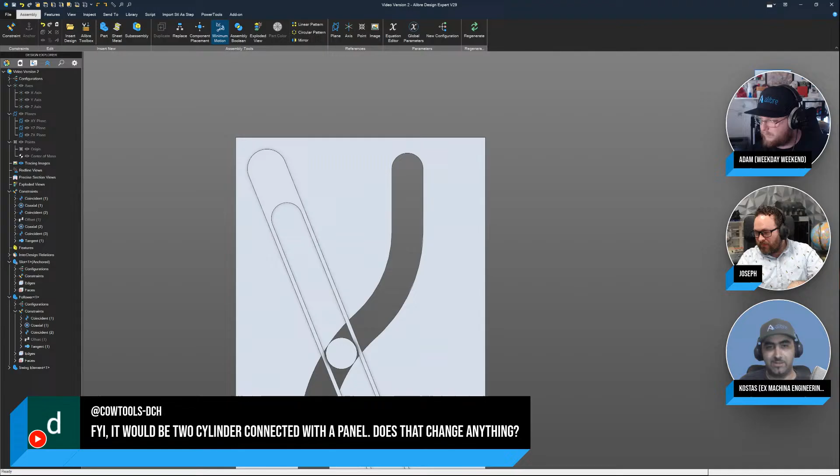You will get the same behavior. Yeah. It's not beautiful, in quotes, to look at, but it is a very robust way of doing it. Alibre is really good at recalculating these things.

I also have another good question here, right? So he's a mech engineering bachelor with a little FEA background. So kudos, Marcus, mechanical engineer. What's the fastest way to learn it, theory first or practice? Well, the theory behind finite element analysis is some pretty hardcore math, like pretty hardcore linear algebra. If you do understand what a Jacobian is, the mathematical definition of it, the Jacobian of a square matrix, for example, you're on your way to understanding the theory.

The theory, by the way, I'll try and do a quick one. You're taking a solid piece and you're creating tetrahedrons, or in the quadratic version, you're dividing up those faces with even more nodes. But the idea is, every single node that you see on screen is connected by a little spring, right, that has the same elasticity as the material you just input. Well, roughly, yeah, okay.

And then you're using Hooke's law to solve all of that in 3 dimensions, and you're creating the matrix of those systems of equations, and you can get matrices of upwards of 10,000, 20, 50,000 elements, and you're solving that. So that's a very, very rough theory behind what finite element analysis actually is. It's just changing the bending equations and all that to just iterating Hooke's law over and over again. So the theory is really complicated.

Where do I download the KeyShot license that I apparently own with Alibre Expert? Somehow got linked back and forth between websites. Do I need a separate account? Oh, you download it directly from the Alibre website. I can show you. Just get the screen. Let me just show you this, guys. Give me a sec. I'll get it.

Well, I think that's about it. Guys, thank you so much for watching, and I think we are going to be having another FEA platform that's going to show a full add-in in the future, and we're going to have one of the highest authorities in geometric dimensioning and tolerancing that I think you can find anywhere. So stay tuned for that. I'm really excited about that one.

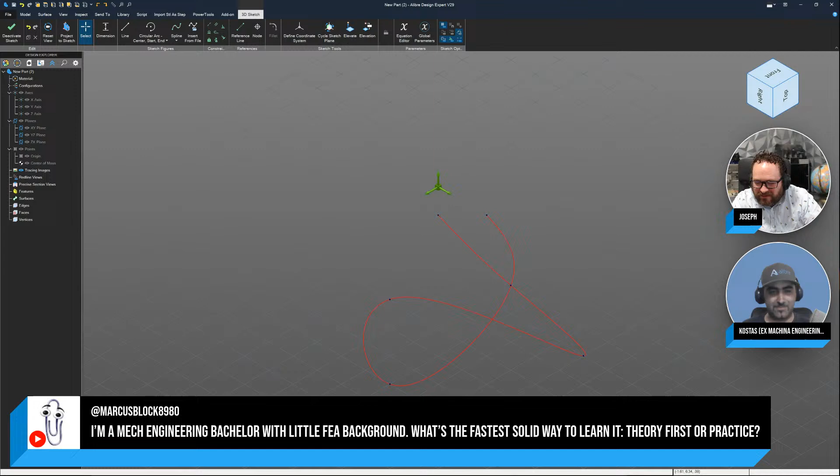Okay, so apparently there's this functionality that I've never used in drawings, but I asked this question internally, and some people got back to me and told me that there's coordinate entry. So I'm just going to try to figure this out live. I wish I had every answer every time, but here we are.

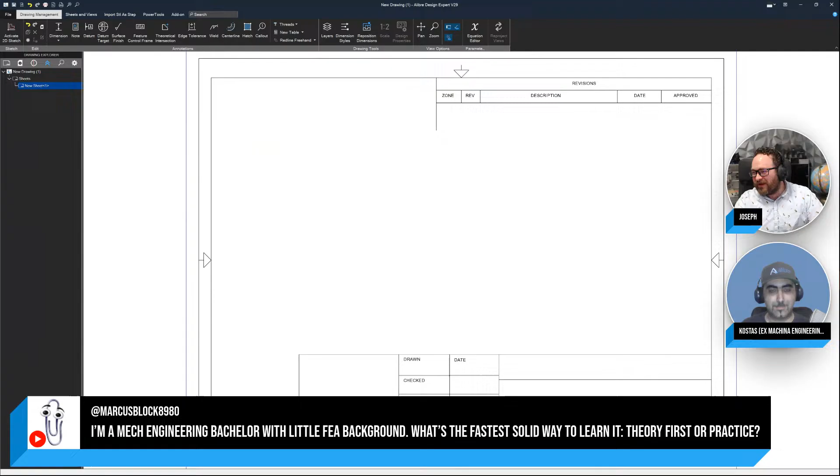Okay, so for the moving chain question that we had, that's another interesting one because it's like a really advanced version of that slot mechanism. So I don't know if I have the best way of doing it thought out, but off the top of my head I would probably take an approach of making one link in a chain and doing a path pattern of all those elements. And so as the one link moves around this path, the others will update like that. That's what's coming to mind for me, and it's probably not the cleanest, but I don't know if you had anything, Kostas.

Oh, I think you might be muted. Sorry. You're on mute. Say again.

Okay. So I've got a very old video of mine that performed very badly, but it's basically called "How to Make a Chain," right? And I designed one chain link, and out of it, I use the path pattern in a 3D sketch and make an entire chain, right? Now, if you do that and you update that path, once you get out of the sketch, the pattern will update.

So you design the chain link as a single part. You go into an assembly and you do a path pattern in that assembly along a path, and that's how you do that. You can find that video on my channel. It's not a very long one, but at this point, that's about the best

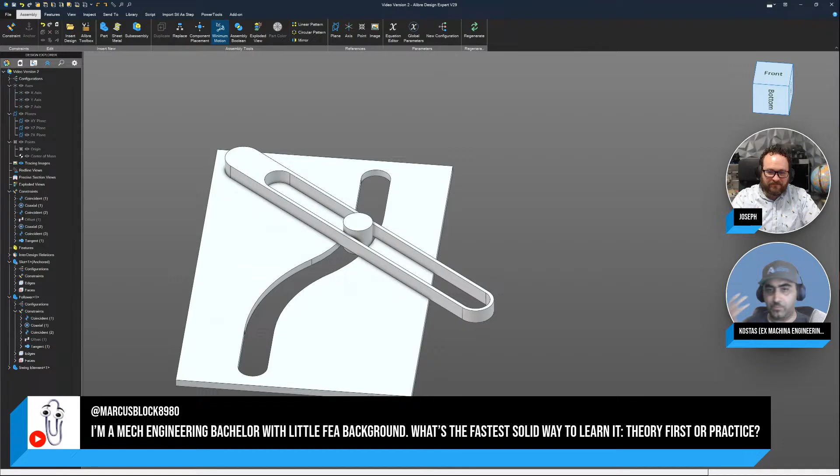Yes, please. Let's say that we have a part like this, right? You see that we've got a button up here that says activate 2D sketch, and it's grayed out. You select a view, and now I can start a 2D sketch. And that 2D sketch is almost exactly the same tools, we have a few additional ones, as I have in my part sketching environment.

So I can make a line here, and then I can dimension it from over here, I think. Wait. No, that's not how you do that. Let me think. I think I remember. Yeah, that's it. Activate sketch on sheet. There you go. Can I edit? There you go. Oh, no, not that one. Yes, there it is. So you see right here, we've got something like an origin point down here.

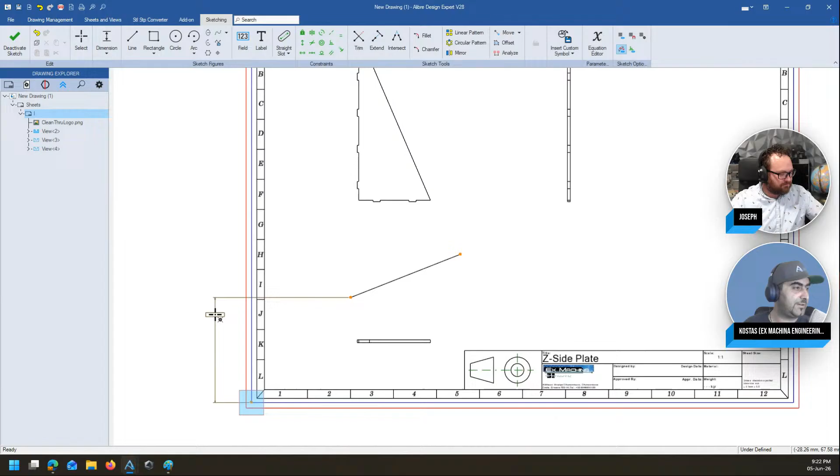So if I make a line, right, I can get dimensions. I can get this dimension here, let's do like 80, and I can get this dimension here, and let's do like 125. So if you want to add elements that are not part of your 3D model onto your drawing, for whatever reason, and you want them dimensioned in a very specific part of the sheet, that's how you do it, basically, right?

So that's what you need to do. You just right click here and activate a sketch on sheet, and it'll give you a point to dimension off of down here. And then the mystery thickens because I'm seeing something else, I think we can do a direct coordinate entry. I've never done this in a drawing before, but it looks like it's supported. I'm just trying to figure out how to invoke it. Give me a second.

By the way, Araf gave us a joke. I'm not sure if it's family friendly, but you can read it in the comments. It's a really funny one. I have to say, OmniCubes is really funny. It really shows how engineers think and mathematicians think and the practical differences between the two. That's a nice one, because that is a very famous paradox. What was the philosopher called? It's with a turtle, right? Oh man, now I need to search. That's a very interesting joke. It goes deep. It's funny, and it touches on higher realities all at the same time. Yeah.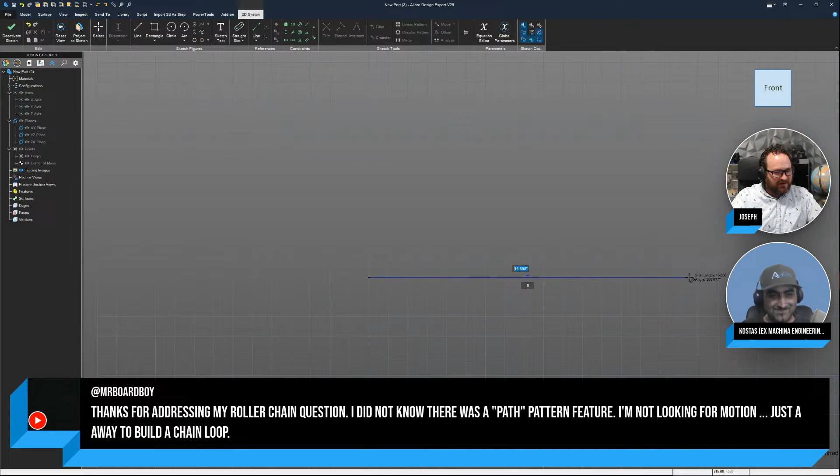So getting back to this one, thanks for addressing my roller chain question. Yes, path pattern is pretty interesting here. So I'll hurry and just run through a quick path pattern. You might want to do something like a slot, right? And then let's say that you have a chain link. I'm just going real fast here to represent this.

I'll maybe make a circle somewhere on here and then extrude that circle. So path pattern, I think we introduced this in V28, and I just choose path pattern. I can choose a path object, and then your chain can go along that. So as long as you have the right version of Alibre, you can make a pretty convincing chain, especially if you're not looking for motion. We might have put too many features on that one. So yeah.

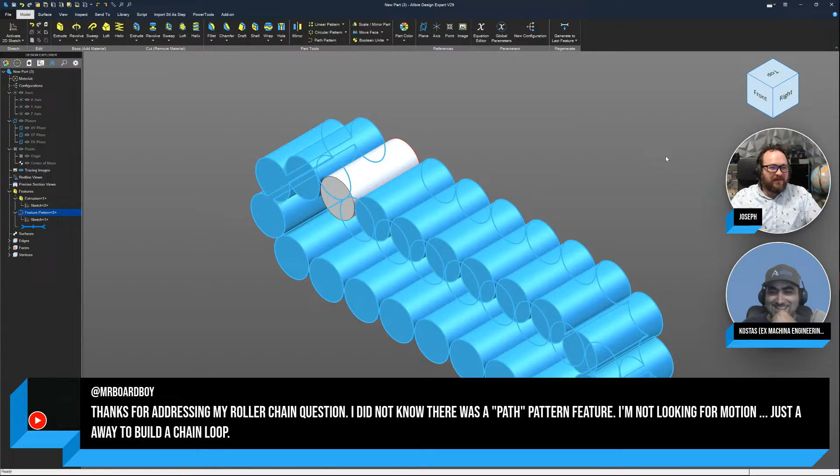And can I just say, Jason Reene beat me to it. That's Zeno's paradox. So that's a nice joke because OmniCube's joke uses Zeno's paradox, which is a very famous philosophical question. I love it. Thanks, OmniCube.

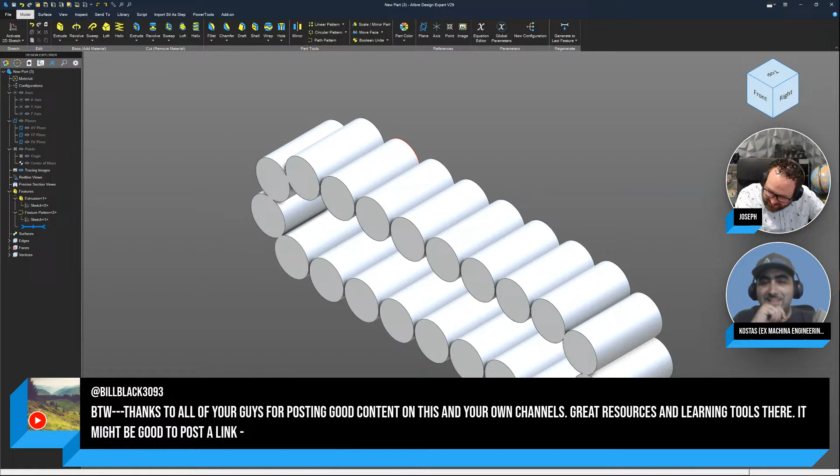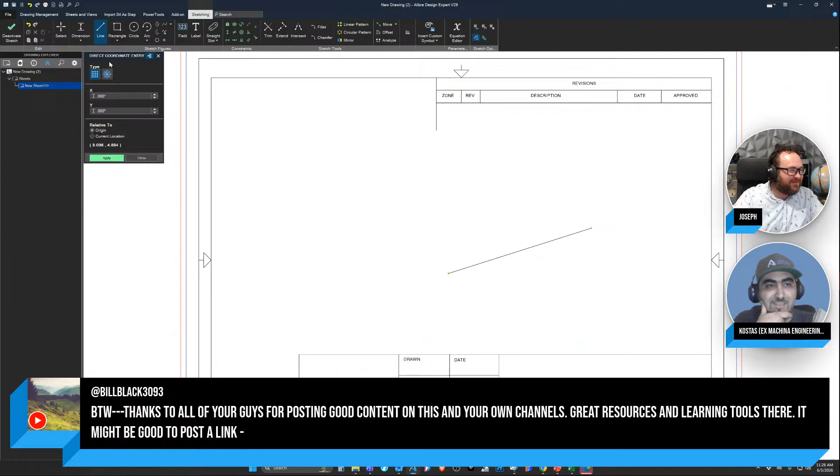All right, checking in Teams here. Okay, perfect, I think. Oh, I think I see the actual button. Isn't that it? Yeah, left of the insert symbol. Insert. Yeah, that one, there you go. It's great for me though, so I'm actually chatting with people internally right now, trying to figure it out. Maybe start a line, get a line going, and then it'll start the line command, and then it'll let you, if it's anything like the direct coordinate entry. Direct coordinate entry. There you go. That's so cool.

And thank you for that question, because even we learned something here. This is so great to have your guys' questions and figure this out. That's a part of community, isn't it? And you have that tool in the hole feature as well, mind you, guys. So when you start a hole feature when you're 3D modeling a part, you can place the node for the hole with direct coordinate entry as well. So keep that in mind.

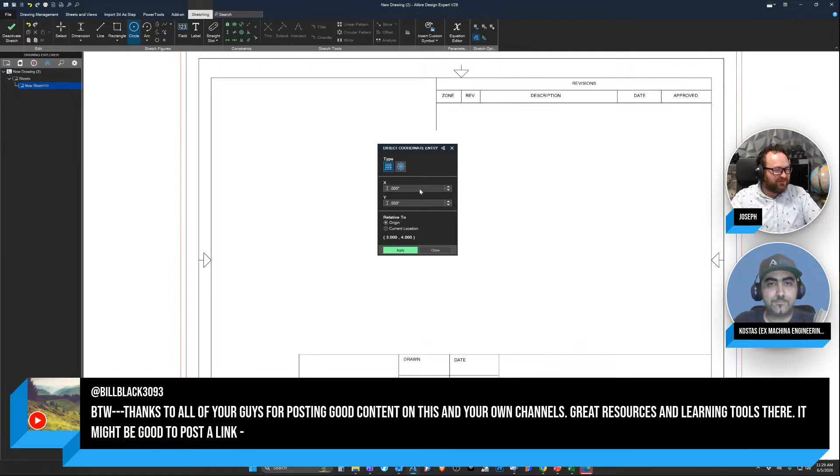That's great. So it looks like I'm betting I can do a circle whose center is coordinate driven here. Oh, that's cool. There you go. That is cool, isn't it? Yeah. All right, so I've learned something new from you guys. Thank you so much for asking. And thank you, Bill Black, you're our best ally sometimes. It was about 65. Yep, there you go.

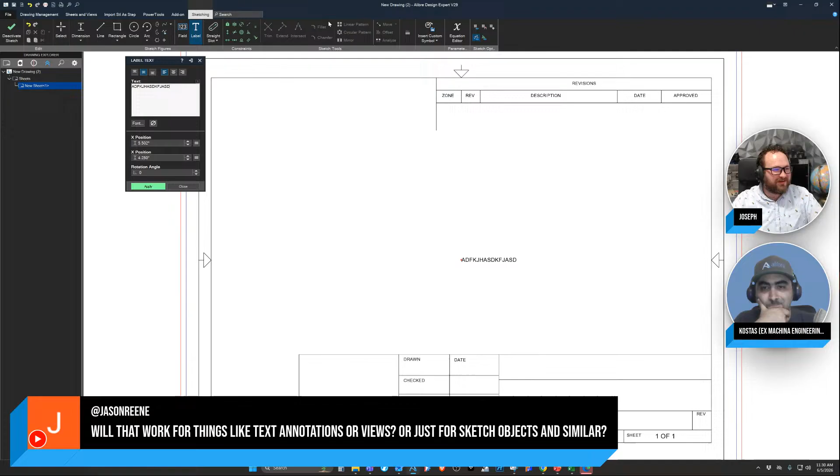Will it work for things like text annotations or views, or just for sketch objects and similar? I imagine it will, especially the leader one. That'll be useful, right? Text node with a leader. Oh, it's grayed out, isn't it? I'm kind of reading that as text annotations. But you know what you could do? You could just do a line with the coordinates you want, put in your text annotation, put the leader onto that line, then delete the line. That's kind of where I was thinking too. Great minds think alike, sir.

Of course. I've picked up a couple of things by watching your videos, Joseph. Appreciate it. Let's see here, 5 and 6. Set my point down. I think I have to set the point down and then do the coordinate here. Yeah, so get a line or a point like that and get that coordinate driven, and then just delete that auxiliary geometry. Yeah, that should work.

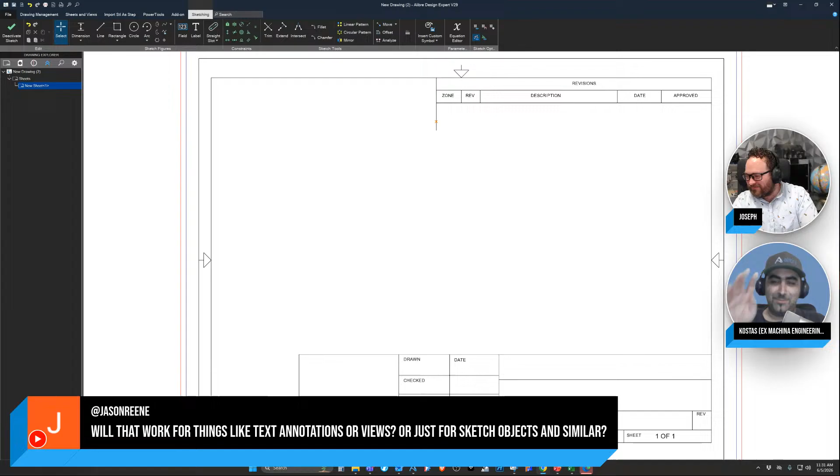It's not a very good one, but there are 3 scientists stranded on a boat in the middle of the ocean, and they only have one can, and they can't get it open. It's a physicist, a chemist, and a mathematician. The physicist says, "Let's apply force there, and that will concentrate the pressure, and it'll open." He does that, and it fails. Then the chemist says, "We'll use the salt water and the sunlight to corrode the metal, and we'll open it." He also fails. And the mathematician says, "Let me try. Let's suppose that the can is open. Now let's think about eating it." That's it. I love it. So sorry for that, guys.